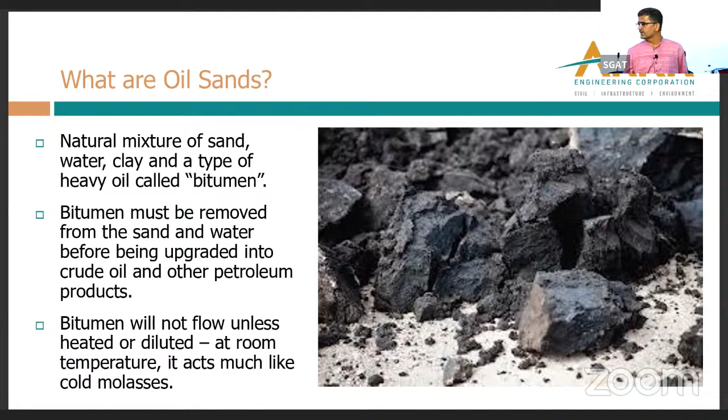As you would have already researched a bit when you saw the topic, right? The oil sands are unconventional deposits that are actually a mixture of sand within which the oil was deposited in the Cretaceous times, when there used to be a shallow ocean, and these basically are very viscous deposits. That's a mixture of sand, water, fines, and bitumen or tar sand. The bitumen cannot really flow at room temperature. It's highly viscous unless heated.

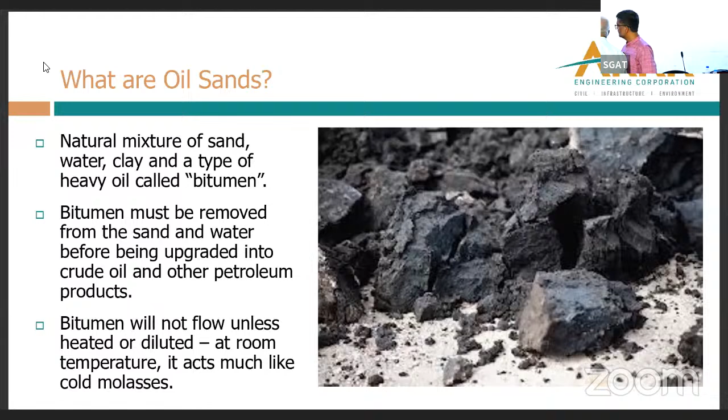They don't naturally flow at room temperature because they're viscous. So they need to be heated in the processing before they can be upgraded into oil products. The mixture is made up of about 4% water, which actually allows the separation from the soil grains. Otherwise, it will be so tightly bound that it wouldn't be possible to separate the oil or bitumen from the mixture if the water didn't exist.

At its best, it's about 14% bitumen, and at its worst, it's 7%, because whatever is below 7% is not economically viable to recover and to process. So whatever is between 7% and 14% is the deposit that is considered as economically viable deposit for extraction.

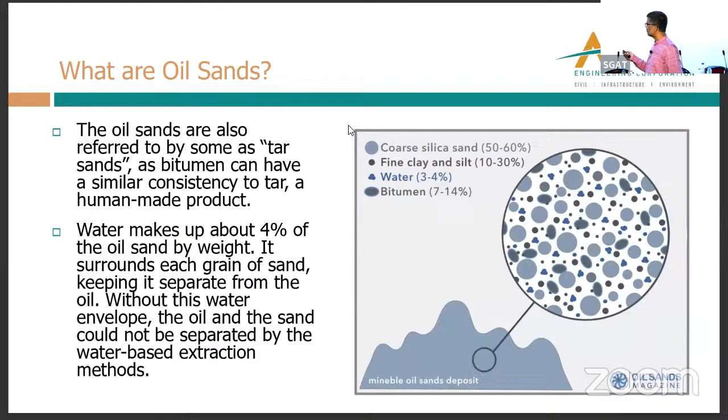Just to give you a brief history of oil sands in Canada, at about the end of the 1700s, when the Europeans came to Canada and were doing fur trading in the province of Alberta, they accidentally got to know about the oil sands, which were the bitumen that was naturally seeping along the river banks of the Athabasca River, and was used by the native people to waterproof their boats and canoes.

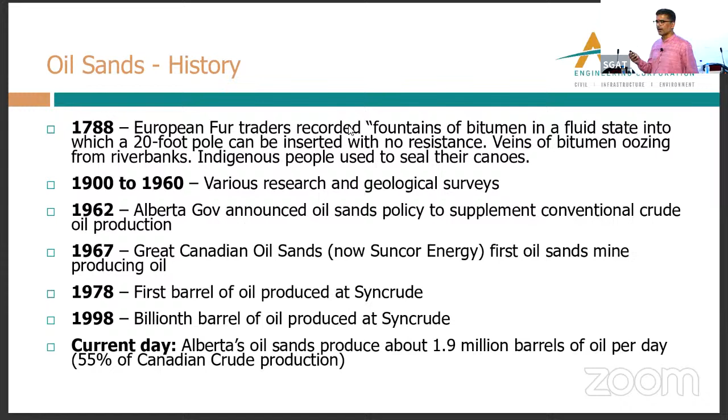As the Europeans took over the country, as it happened all over the world in those times, there was a lot of exploration at the start of the 1900s to understand the extent of the deposit and its economic viability. In 1978, the first barrel of oil was produced from oil sands, and today about 1.9 million barrels of oil is produced from the Canadian oil sands every day, and that's about 50% of the total oil that Canada produces.

Canada has about 173 billion barrels of proven oil reserves. A barrel is about 160 liters, give or take. 97% of that is in oil sands. So you can see the importance of oil sands to the Canadian economy, because Canada is basically predominantly a resource-based economy.

Over half of this oil that is produced and exported from Canada, and mostly it's processed in the US, comes from oil sands. 19% of these oil sands are close enough to the ground surface and therefore are mined using surface mine techniques, and contribute the 19% of that through surface mining.

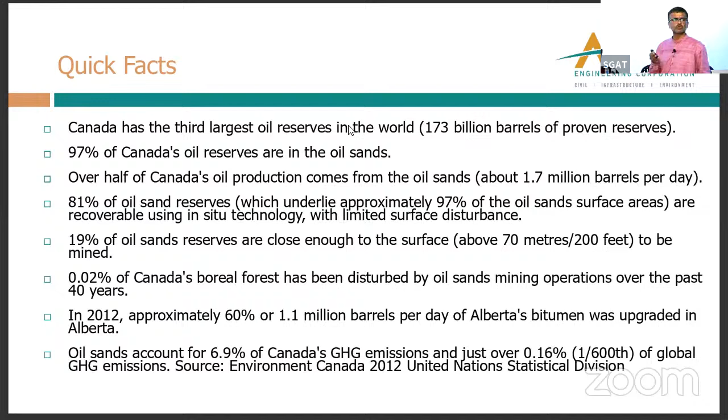About 1,000 square kilometers of area, which accounts for about 0.02% of boreal forests, or what we call the taigas or the coniferous forests, has been disturbed due to these surface mining activities. And about 7% of Canada's greenhouse emissions occur due to the oil sands mining activity.

Just to show you where the Canadian oil sands are, where is the pointer here? Sorry.

Okay, yeah. So that's North America. That's our, like, India's newest military friend.

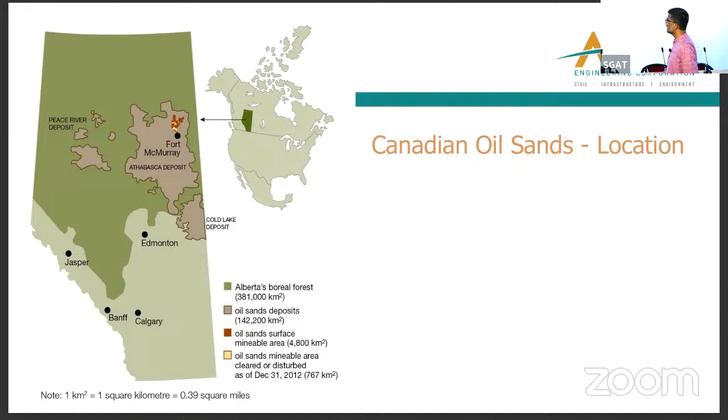That's Canada, the province of Alberta, and then that's the Fort McMurray area, and the sedimentary basin as shown here, wherein the Canadian oil sands occur. As I was saying, 19% of it is close enough to the surface and is being mined by surface mining techniques.

Anything that exceeds about 70 meters is not economically viable to mine using surface mining techniques, and then is either mined using what we call steam-assisted gravity drainage, wherein two horizontal wells are used and steam is pumped in the upper well that melts the bitumen, which flows gravitationally to the next horizontal well situated below it, or through continuous steam cycling in a single borehole.

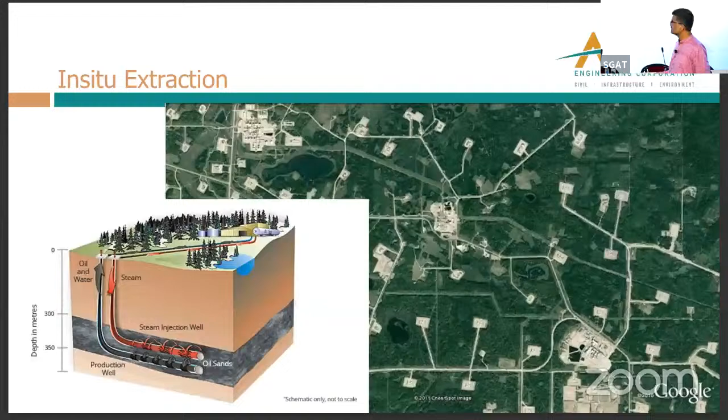When you look at the in situ extraction, which is not what we're going to talk about, but is about 80% of oil sands production, you can see in the aerial view oil well pads, wherein these SAGD or steam-assisted gravity drainage operations take place, and bitumen is extracted using a conventional well and then transferred to a processing facility. But it's the surface mining that I'm going to talk about, because that's the area I work in and my company works in, which I'll introduce at the end of the first section of the talk.

How big is this mining operation? The biggest haulers in the world, the Caterpillar 797s, were produced by Caterpillar only for oil sands mining, because the volume of earth material moved in these operations was so big that the conventional haulers were not enough. So in 1998, Caterpillar designed the 797 originally for oil sands, which is now the most common hauler all over the world in the mining industry.

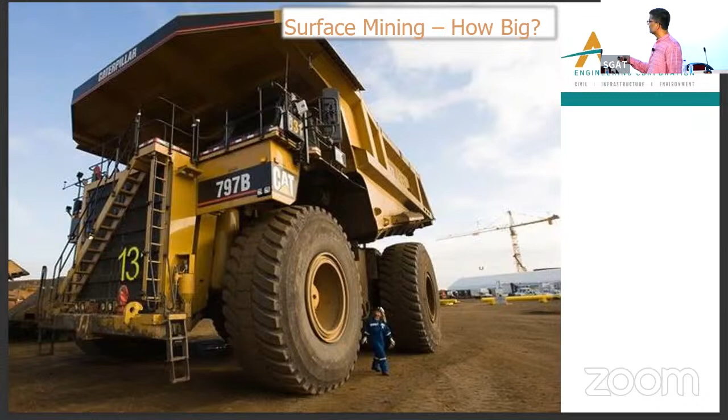But to tell you how big oil sands surface mining is, it is at the moment in an area of about 1,000 square kilometers. It started in the early 1990s, where it would have been about 50 square kilometers, and has expanded to an area that's unimaginably big. This is just to show you some snapshots. If you can move that video box, if you don't mind.

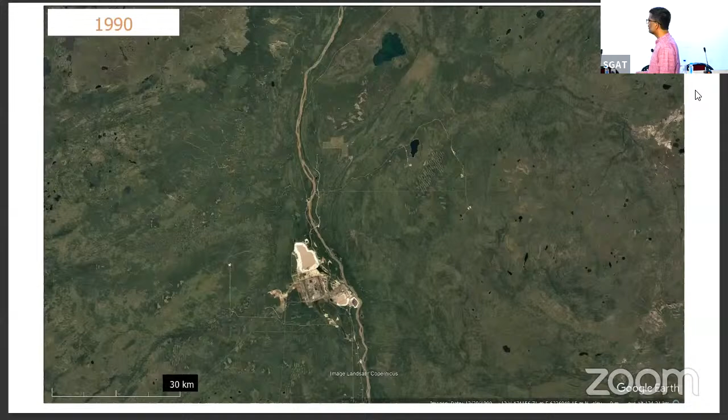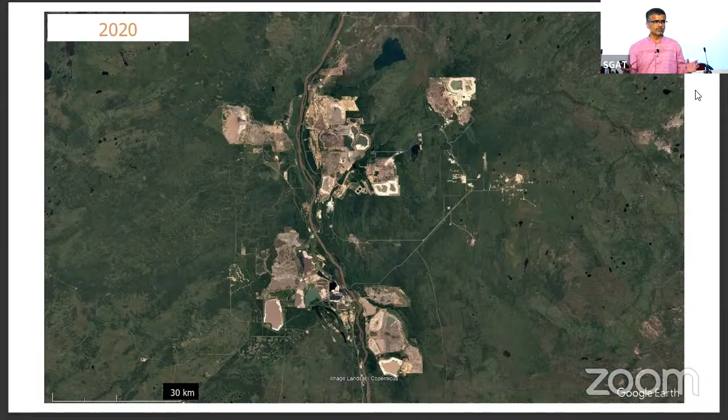Yeah. In 1990, as you can see the scale here of about 30 kilometers, you had about 50 to 75 square kilometers of area disturbed. That has grown to about 1,000 square kilometers in the current day. Some of the tailings ponds that store the tailings from oil sands mining can be seen from space. That's the nature of the mining that occurs in this area, which is nothing to be proud about, but just to give you a scale perspective.

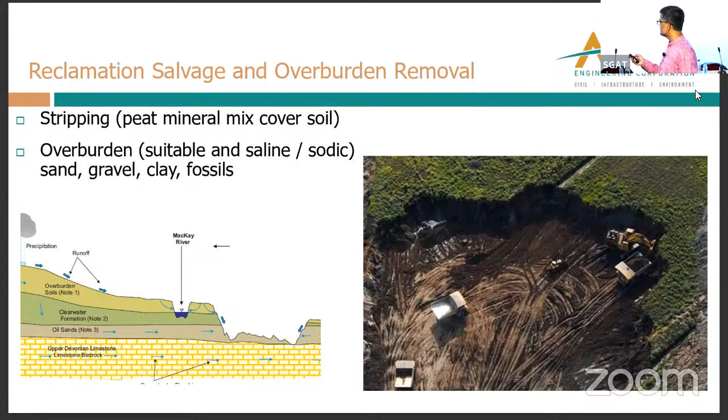How do the operations occur? The oil sands are a part of the boreal forest, which have about 10 meters of organic soil, which is stripped and salvaged for reclamation purposes and stored within the mine sites. And then the overburden material, which is all material between the ground surface and the ore deposit, is also mined out and stored in overburden dumps before the extraction of the resource itself can start.

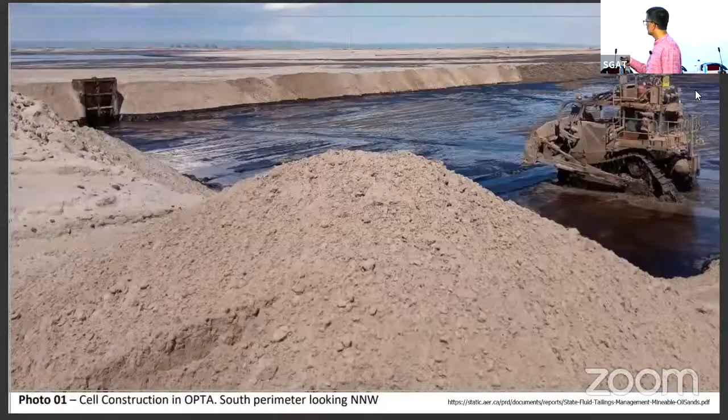This picture shows one of the outcomes of this whole process: as I said, there's only about 7 to 14% of bitumen in the ore deposit. The rest of it is all stored in tailings ponds as mine tailings, and the mine tailings are massive ponds that store sand from which the oil has been extracted, and fines.

There are about 30% fines in that, and tailings water, 90% of which is recycled and used in the processing. As I said, the ore is mixed in hot water and caustic soda. All of that water is again recycled, and the oil sands industry basically recycles 90% of the water that it stores in the tailings ponds.

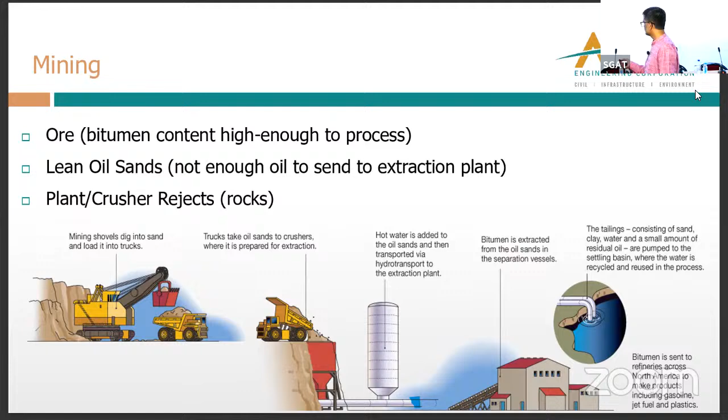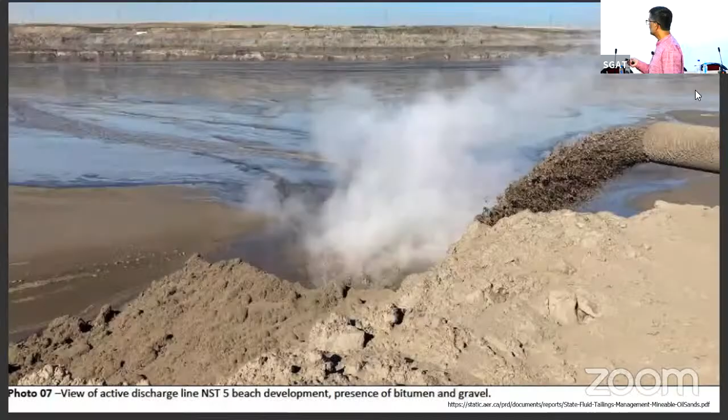The next picture basically shows the water, sand, whatever oil is remaining after processing, and fines being supersaturated and then transported to the tailings ponds and deposited into the tailings pond for storage. And then this is basically a massive beach of sand that's on the water side of the tailings pond that runs for several kilometers at times. So you can basically see it's really flat until you reach the water surface, which is here. This is a beach that's being poured using hydraulic techniques and transported in a pipe as shown in the previous picture.

How does a tailings pond look like? In general, it has the coarse tailing sand, which I just showed in the picture, and above which you have fine fluid tailings, which are floating in water, which eventually settle down over time to form mature fine tailings. But these mature fine tailings still contain about 30% of water, and this water has to be expressed or removed over time before the tailings ponds can be reclaimed.

Because with the reclamation of tailings ponds in any mining industry, we disturb the area, but the area has to be returned back to the public in general, because the public owns those lands. In a way, the nation owns that land, so the land has to be returned in as close to a natural form as possible. If there's 30% water in the mature fine tailings, it can take about 150 years to drain this water. And the problem with soft tailings, such as the fine fluid tailings and mature fine tailings, is that they are not trafficable because they don't have enough shear strength. So if they are not trafficable, then they cannot be reasonably reclaimed.

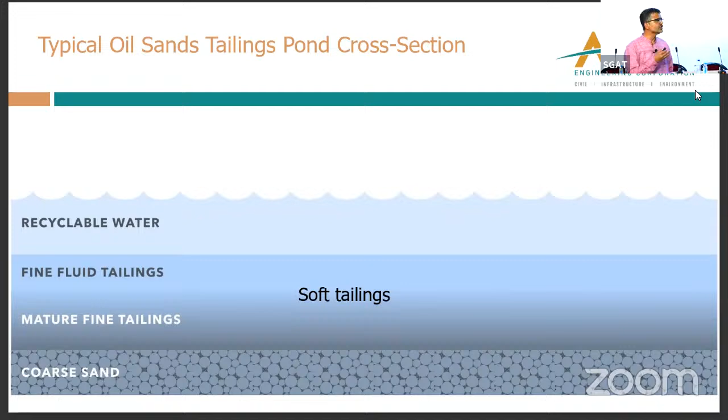This picture shows a cross section of a tailings pond that I'm talking about, wherein we saw that those are compacting this side of the dam. The dam has to be built to hold all the tailings behind it. This is the beach that I talked about, the beach that runs for many kilometers. And then you have the fine tailings suspended above the beached tailing sand, and then water on the top. And all of this is being held in several tailings ponds as the operations proceed.

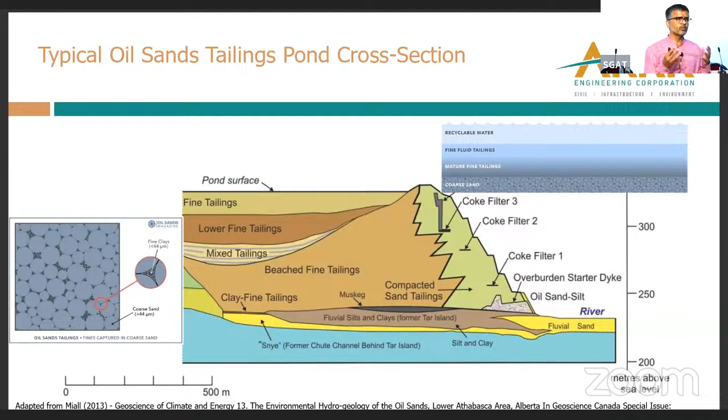One of the reasons why beaching is possible in oil sands is the fines content in the mixture. It allows for the sand spaces to be filled and provides natural shear strength to it. So that basically allows you to beach the sands behind the dam structure. Next slide.

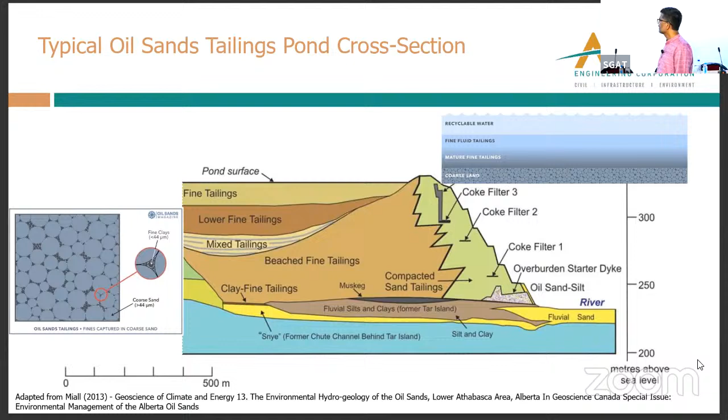Right. So then the dams are a problem, right? In the end, you cannot have dams all over the area, because if there are dams, it means that there is liquefiable material that's ready to flow behind it. And if you have liquefiable material that's ready to flow, you cannot leave it for nature to take care, and therefore dams need to be decommissioned before the land can be returned to the public.

Within the oil sands, there are about 243 dams. About 30% of which have an extreme consequence classification, which is based on the amount of loss of life, environmental and cultural impacts, and economic and infrastructure and property impacts if that dam was to fail. About 25% are very high and high consequence dams, and an equal number are significant consequence dams.

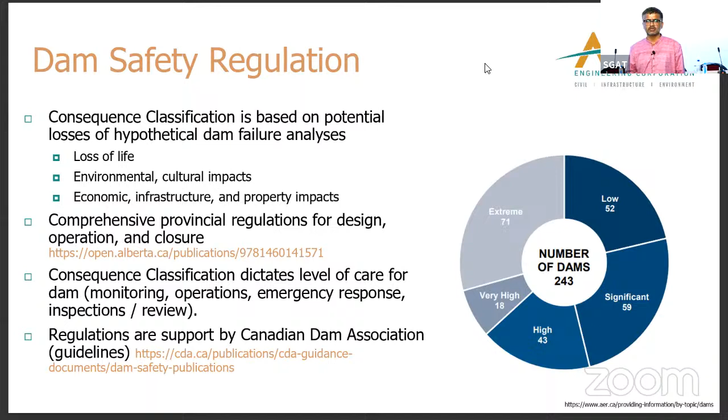There are regulations that have been developed in recent times to guide operations of these dams and the closure of these dams, and those are being developed by the Alberta Energy Regulator, which is the provincial body that regulates the oil sands industry, and the Canadian Dam Association, which basically regulates dams across Canada.

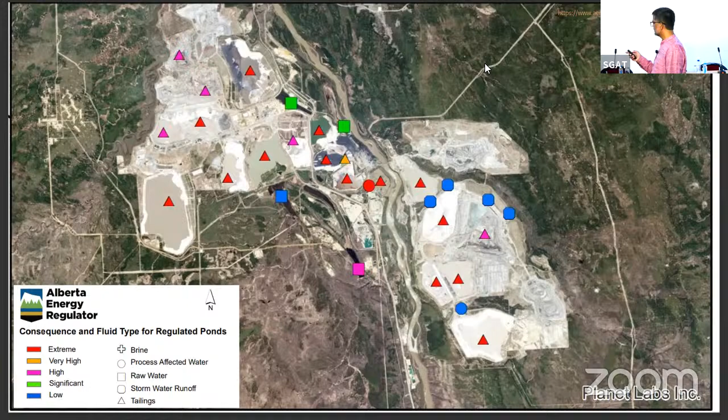This is a snapshot of one of the sites. This is, give or take, a 60 kilometers by 80 kilometers mine lease, wherein the various dams are shown. And as you can see, all these mine sites are scattered with significant, high and very high risk dams, which need to be taken care of before these mine sites can be closed.

These dams are holding significant amounts of tailings behind them. As you can see, in 2014, they were holding altogether about 1,100 million cubic meters of coarse, fine, and water tailings. And in 2022, that number had grown to about 1,400 million cubic meters.

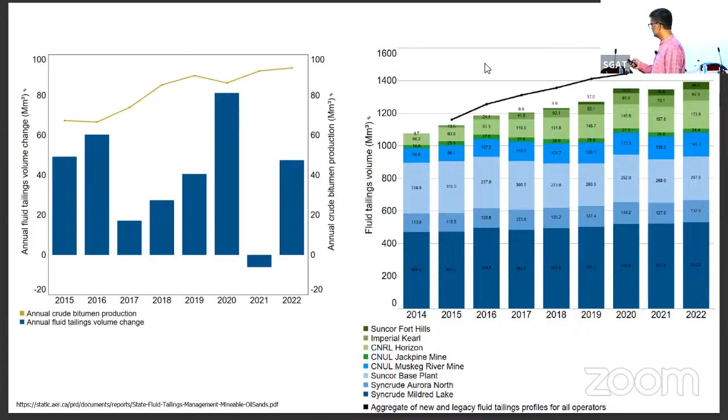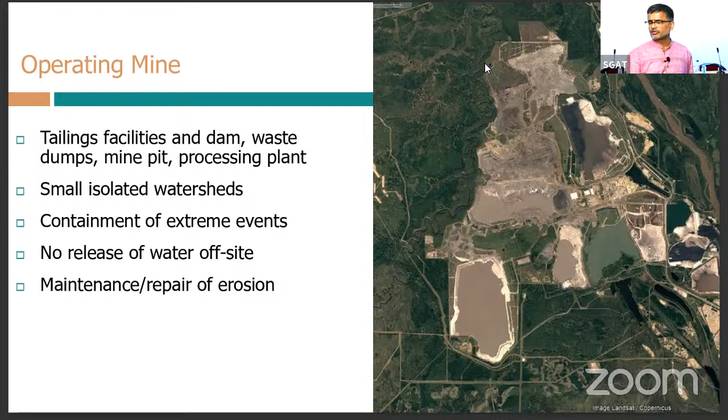But they also consist of small isolated watersheds that have been left behind where area has not been disturbed. And then containment of extreme events is required when a mine site is operating. There is a mandate of no release of water off site, meaning any water that falls onto the mine site naturally or is being brought into the mine site from major water bodies for processing has to be stored onto the site, and the maintenance and repair, such as the erosion of the features, have to be managed actively so that the mines can operate safely.

However, these mines, as I said, have to be returned back to the public and to the nation as natural as possible a landscape as it existed before these mines were active, and that will only be possible when these mine pits are backfilled, all the dumps are stabilized, the processing plants are dismantled and taken away, tailings are consolidated and dewatered into solid landforms. But I said that some of the fine tailings would take about 150 years to dewater, so that's a challenging problem. Water cap tailings are put into former mine pits.

All the watersheds are interconnected using conveyance channels that have enough conveyance capacity and robustness to convey extreme floods. And these have to be self-sustaining, meaning that they do not need any active care because there is nobody to care for it. It's no more an economic resource. It's not producing anything at that stage. So it has to be a self-sustaining landscape that cares for itself.

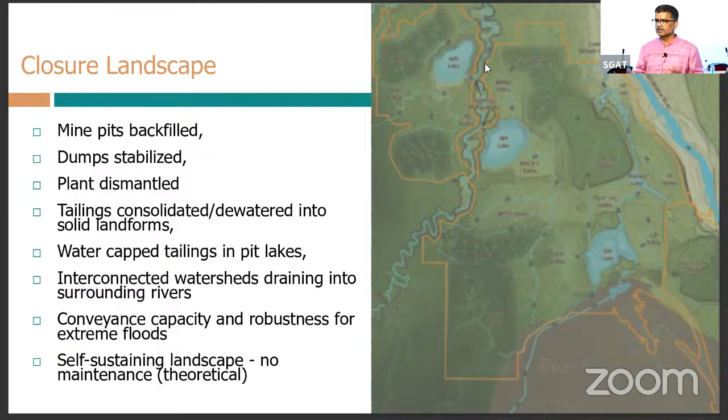That brings me to the closure part of the oil sands mine. So far, what I was talking about is the story that started in 1978 with the production of the first barrel, and it continues till today and will likely continue until 2100. But the oil sands have to be closed in the next 100 to 1,000 years, and that's the timeline they are looking at, which might sound unreasonable to a lot of us, but that's what the guidelines are.

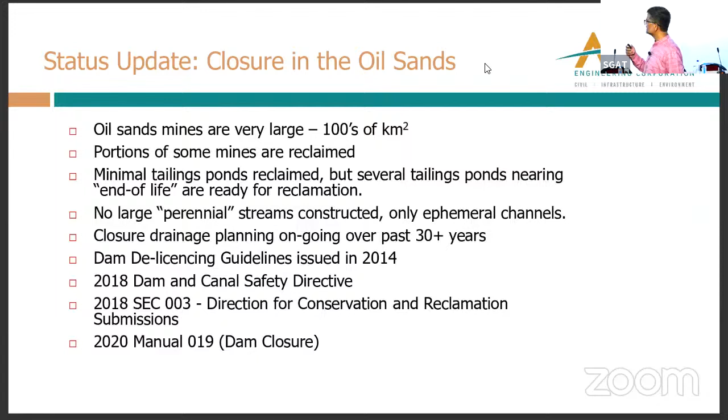And these oil sands mine closures are being planned because most of the mines are at a mature stage. Most of the tailings ponds are at a mature stage, and therefore some of the mines are coming up for reclamation, and some of the mine leases are coming up for closure in the time frames that I talked about. The status is known, but the challenges are many because the stakeholders, which are the operators, the regulators, general public, and the government, their expectations are very, very high. And the expectations are that the hydrologic regimes in the pre-mining conditions need to be restored.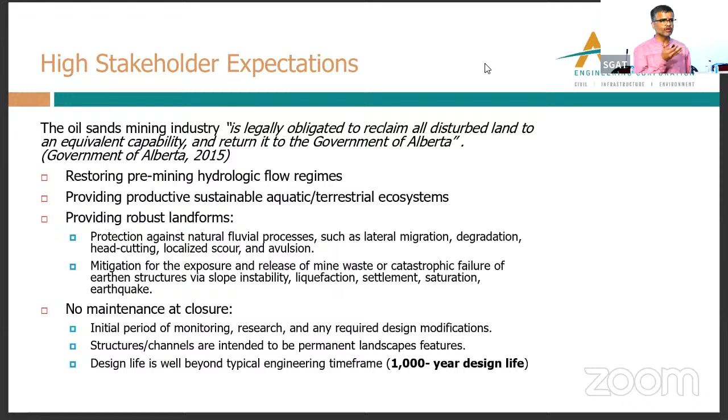The reclaimed sites need to provide sustainable aquatic and terrestrial ecosystems as they existed before mining. And the landforms need to be robust from a physical stability perspective and geochemical stability perspective, and need to be robust throughout major hazard events like earthquakes, or need to withstand those. And as I said, they would not need active care, or minimal maintenance, with a design life of 1,000 years and more, which starts to sound really unreasonable, because none of us will be there to see how these evolve 1,000 years from now.

What are the reclamation objectives? Again, the closure landscape needs to be self-sustaining. It needs to integrate itself into the surrounding natural areas. It needs to establish the boreal forest, upland, lowland, wetland kind of ecological system. It needs to yield water at a suitable amount and suitable quality. And it needs to be planned in consultation with the stakeholders and have the capability equivalent to pre-mining.

I'll briefly run through the closure conditions of these and then show you an example of mine closure that we have been working at. ARK, which I work for, is an engineering consultancy. They work today with the oil sands mining operators, doing all the engineering aspects, including civil engineering, hydrological engineering, process mechanical, electrical, and other disciplines. But also we are helping advance the closure of oil sands as well.

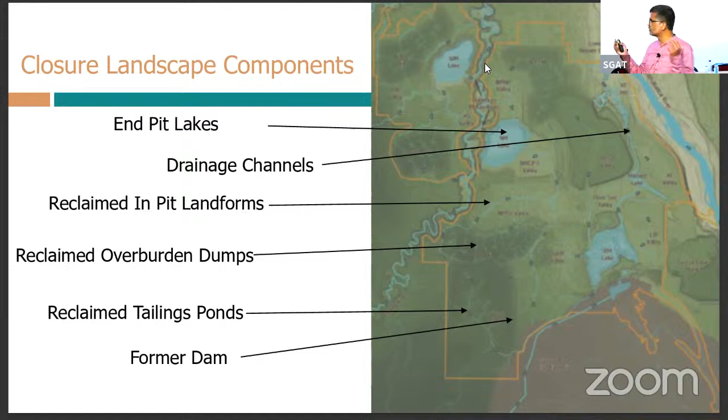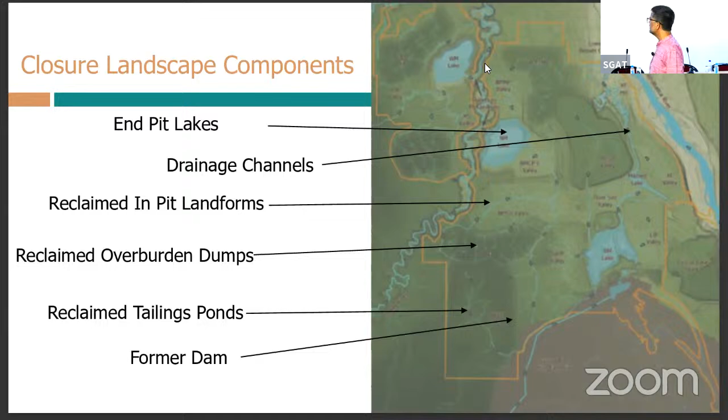In a closure landscape that will exist in future, the main components will be end-pit lakes, which are required to store the water that is drained from the landform, the drainage channels, which will convey that water to these end-pit lakes and to the environment, the reclaimed in-pit landforms, which were former mines, the reclaimed overburden dumps, which are storing all the overburden material that I talked about at the start of the talk, reclaimed tailings ponds that I spent a little bit of time describing, and all the associated dams.

I'm not going to speak about these components in sequence, because although I arranged them by their importance, I'll speak about the ones that are being reclaimed first, which are the reclaimed in-pit landforms, which were former mines, and the tailings ponds and the dams.

One of the problems with the tailings ponds is that they are storing a lot of water and tailings behind the dams that they are contained with. This will continue for about 15-20 years, depending on the life of the mine. And then the challenge is that if those need to be reclaimed, then within a very short amount of time, these tailings and the water need to be managed, which actually is the biggest challenge, because with this water management, there is not enough space to manage all the water that is contained within these sites at the current time.

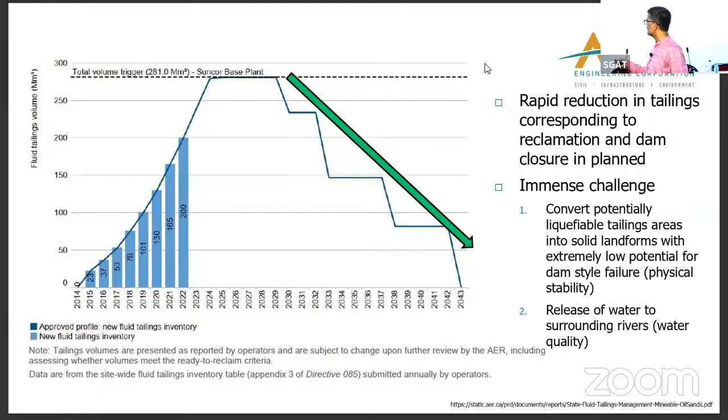Then there is the challenge of geotechnical stability. If nothing is stable geotechnically, then it doesn't matter at the end of the day. Things have to stand on their own, or they have to be structurally sound to be able to withstand any catastrophic events. Therefore, a lot of work is being done using CPT data, estimating the materials being deposited into these structures, and development of reasonable models over time, and also looking at settlement of the fine tailings and the consolidation rates, and also the liquefaction potential.

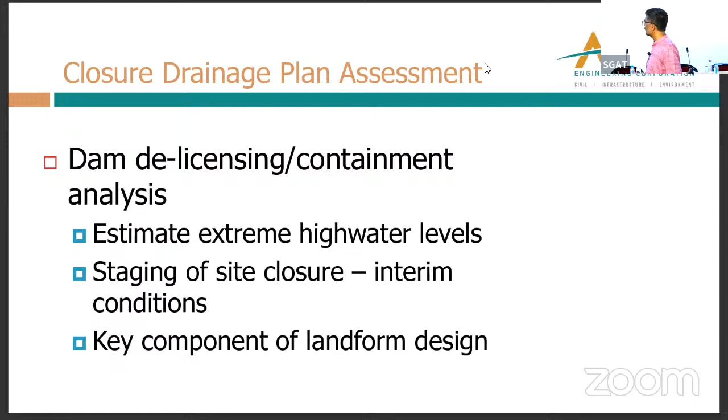The closure plan, one of the biggest topics that I've been delving into, is the dam delicensing aspect within the closure drainage plan assessment, which deals with understanding the capacity of these dams to store the water, staging of the site closure, which includes the interim conditions, therefore managing the dam delicensing and closure while the mine operations are active, and also them as a key part of the landform closure design as well.

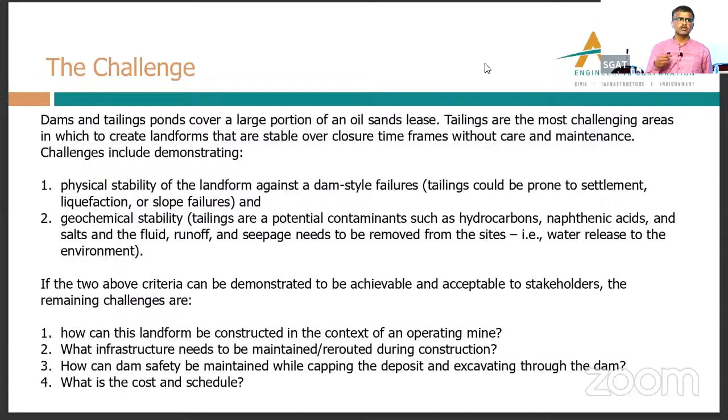The challenge, again, I've touched on this already, is that these dams need to be physically stable and geochemically stable. But once that is achieved, the people working in the oil sands industry need to understand how the landforms behind these closed dams can be constructed. The infrastructure needs to be maintained and rerouted during the construction itself, dam safety needs to be maintained during the capping stages, and after all, the economics of it would also play an important part.

Can we move the bar?

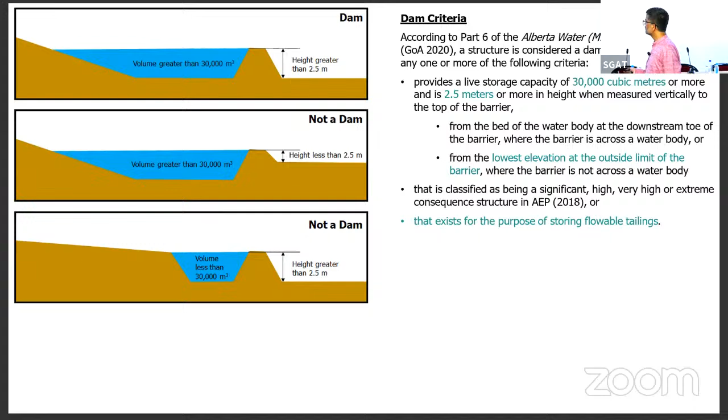But it's okay actually. This slide deals with the definition of the dam itself, and the key definition is that the Alberta Energy Regulator defines as a dam anything that stores 30,000 cubic meters or more of liquefiable material, and that has about 2.5 meters or greater height from the lowest point on the air side, or the base of the pond itself. And then it obviously needs to exist for the purpose of storing material that can flow.

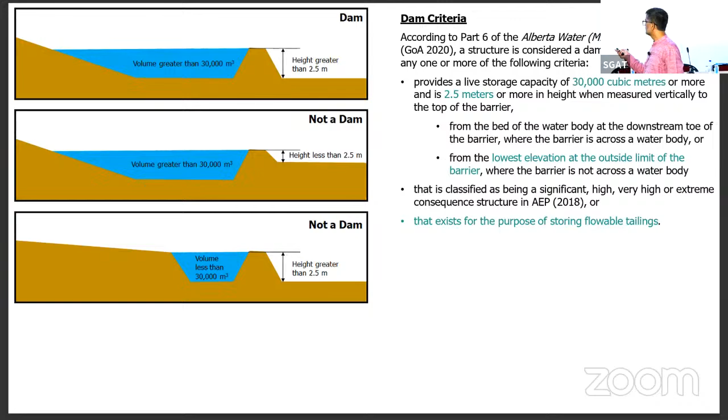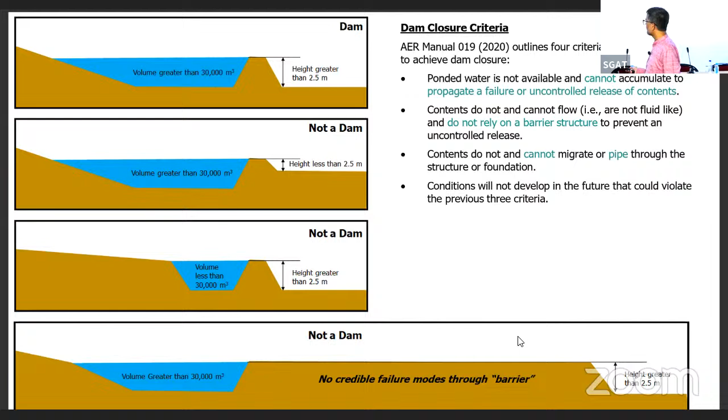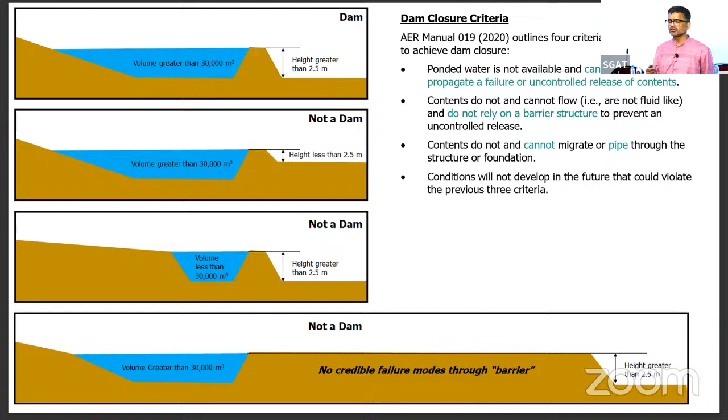But what is the dam closure criteria then? The closure criteria, which are being developed as time goes, are that ponded water is not available and cannot accumulate behind these structures. The contents cannot flow, meaning any liquefiable tailings cannot flow through a piping mechanism, and conditions will not develop in the future that could violate the previous three criteria, meaning it's for the current, but also for the future.

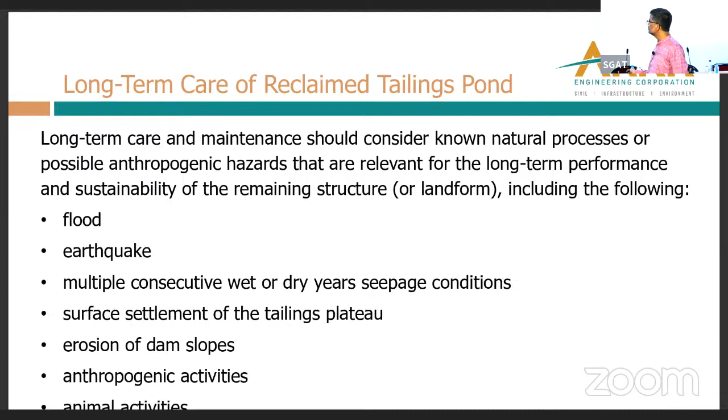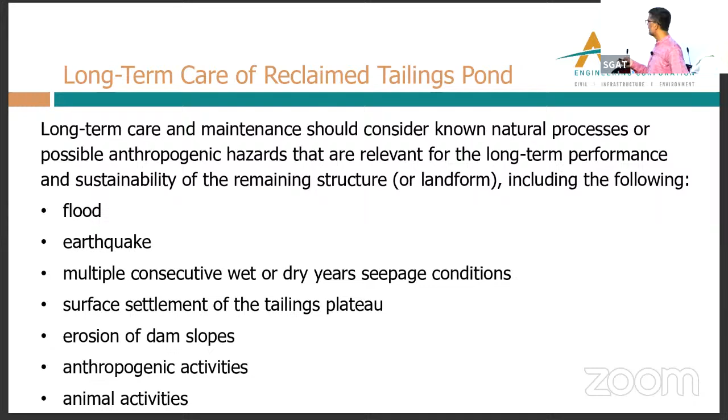And then once this is all taken care of, the long-term care needs to be initiated, wherein these structures need to be robust enough to withstand flood, earthquake, multiple consecutive wet and dry climate cycles, surface settlements, erosion, any anthropogenic activities, because we cannot control all of that, and natural animal activities like burrowing, which can cause piping failures.

That brings me to the reclamation of the drainage channels and overall landscape as a part of the closure landscape, and the overburden dumps. One of the most important things with the reclamation of the overall landscape is that the oil sands industry in Canada is part of the boreal forest, which is a water deficit area, meaning the potential evapotranspiration is greater than the precipitation itself. It has large groundwater recharge. It has an extensive wetland network, which is inefficient in draining the landscape. It has small and variable surface runoff, and it has a tightly coupled surface water groundwater system.

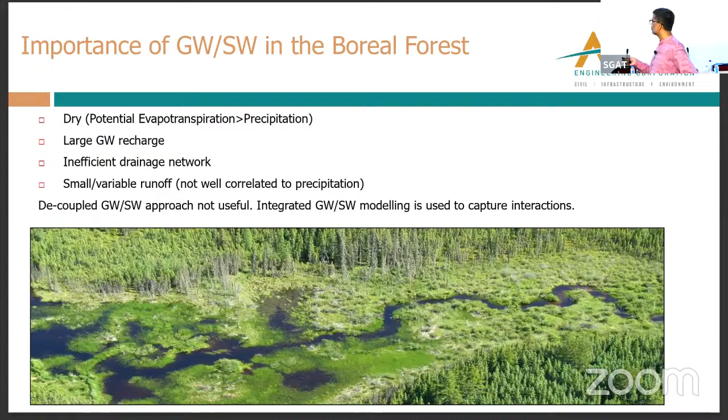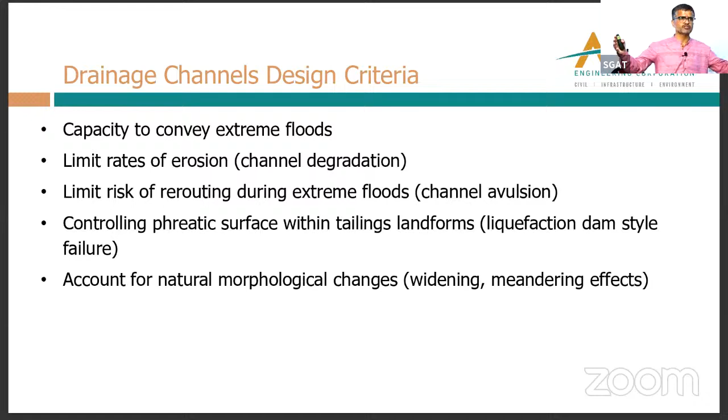The drainage channels that will drain these reclaimed or closure landscapes need to have enough capacity to convey extreme floods, limit rates of natural erosion, and limit risk of rerouting during extreme floods, which is channel avulsion. They need to control the phreatic surface so it doesn't lead to liquefaction type, dams type failure, and account for natural morphological changes like widening and meandering of channels.

Once all of this is considered, you need to think of ecological design, meaning use of the natural species, and also understand how species are going to change over time, especially in times of climate change. That also includes the importance of the ecological setup for the native people who have lived in these lands for thousands of years.

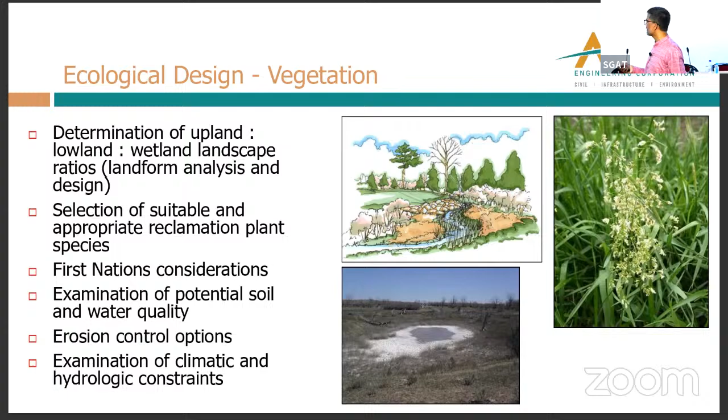As I talk about ecological species or ecological design, in the boreal area there are tons of species available, and that comes from the fact that it's a lightly sloping, gently sloping landscape that has upland vegetation, intermediate vegetation, and wetland vegetation.

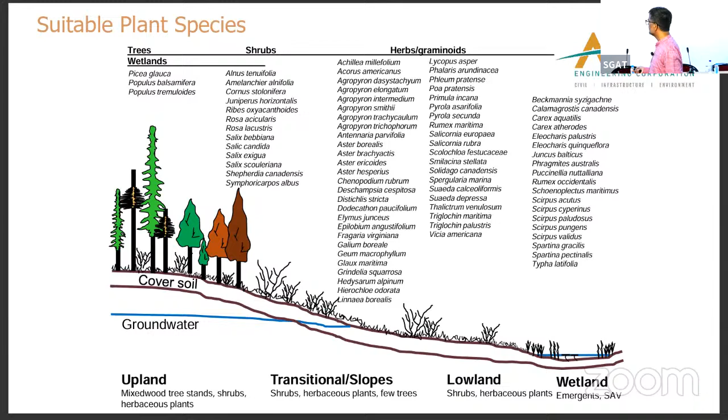There's tons of research, a serious amount of work being done in cataloging all the species that can therefore be used in the post-closure landscape.

And finally, the wildlife needs to be restored, which also means understanding the habitat requirements for native wildlife, and the habitat connectivity itself, so they can move freely through the reclaimed landscape. The most important animal in these landscapes is the beaver, which basically likes creating dams for itself and living in water.

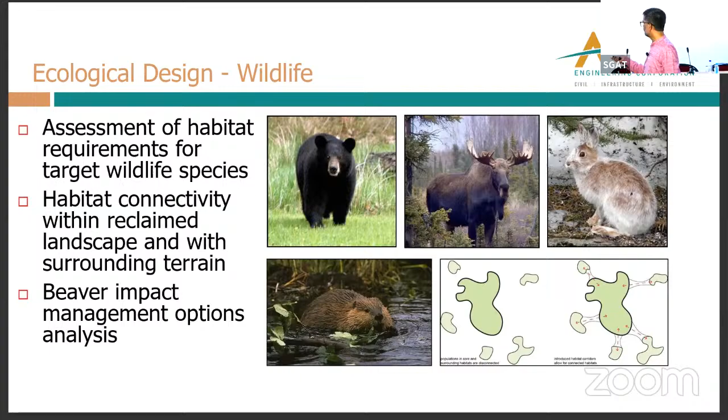Those considerations are very important, because beavers can basically form dams without any real intent on part of the reclaimers to have dams in the landscape.

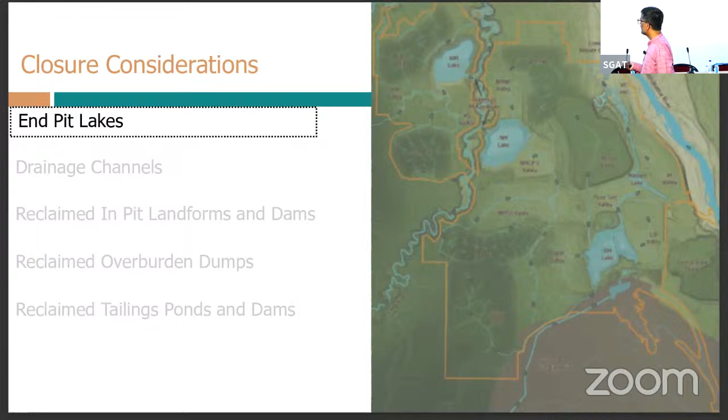I'll talk about the last but not least, the most important feature, which are the end-pit lakes, which store water and mimic natural lakes that existed before mining started. The problem with end-pit lakes' sustainability is that, again, this is a water deficit area.

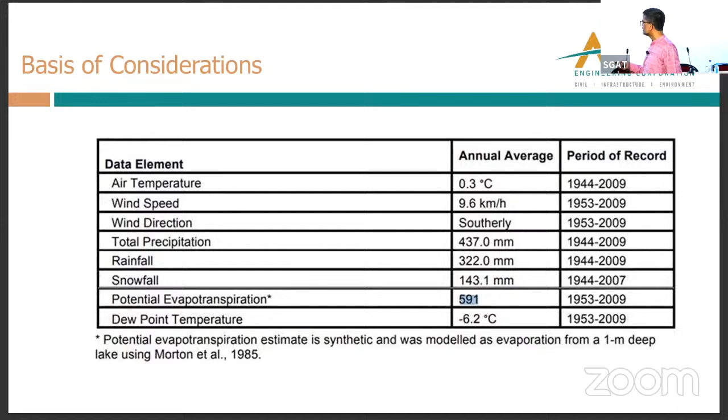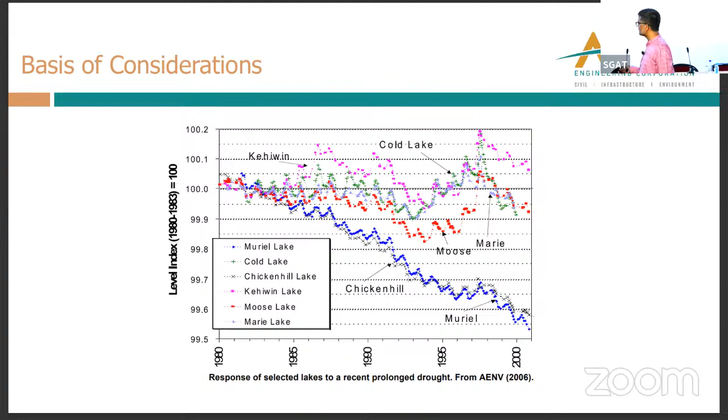So the recharge needs to reach all the lakes in a reasonable fashion for the water budget to be right. Naturally, many natural lakes actually have declining profiles during droughts. 1980 to about 2000 was a drought period in Alberta, so natural lakes can decline and recover, and that's also applicable to the end-pit lakes.

But in general, if precipitation was to be on a deficit side due to increasing temperatures under climate change conditions, then you would have end-pit lakes that are not sustainable from a water budget consideration, but also won't be geochemically sustainable, because there's not enough water to dilute the chemical constituents.

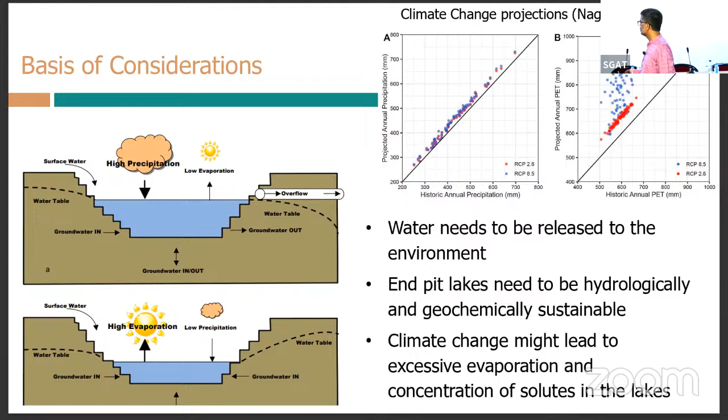Having put forward a lot of material so far, the most practical way of reclaiming and closing these mine sites is to plan for mine closure, which includes determining the objectives, designing, and developing management strategies, implementing that, evaluating and adjusting as we learn, and redoing the same adaptive management process over time with other mine sites.

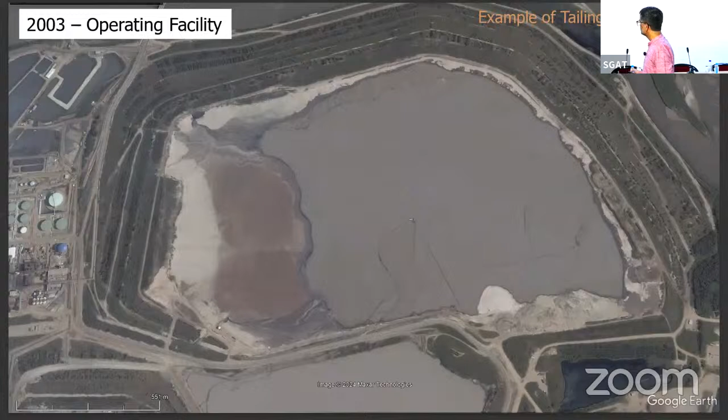That brings me to an example of one of the mine sites we have helped—or this is not one we helped reclaim, but it's a similar mine site that is, in this case, a tailings pond where you can see the sand beach and soft tailings.

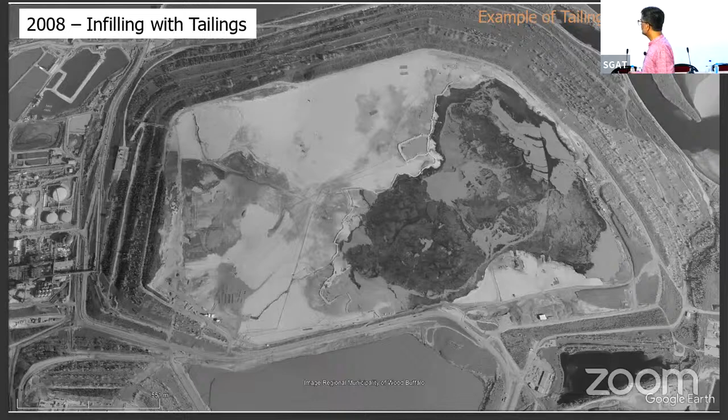This was deposited at the end of mining. This is when the mine was being infilled, around the year 2008, so it could have a base of material over which the reclamation surface can be developed.

And basically today it's in the stage of establishing wildlife habitat and connectivity, and the hope is that within the next 10 to 25 years it will be fully reclaimed and certified.

Some closing thoughts: oil sands mines are large operations that contain major economic opportunities, but also major geoscience and hydrological problems, which are being dealt with through closure plans developed with a combination of geomorphic approach and traditional armoring for the dam aspects.